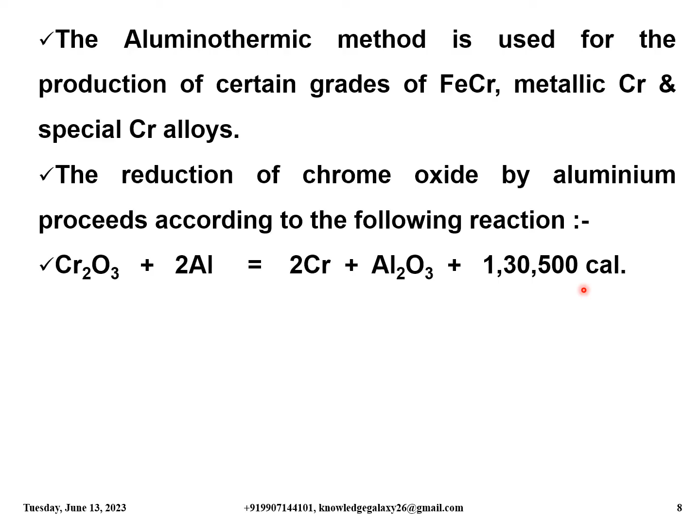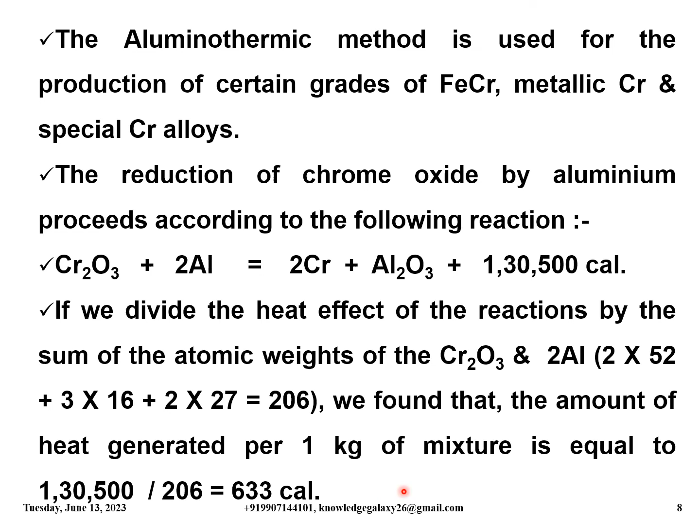If we divide the heat effect of the reaction by the sum of the atomic weights of Cr2O3 and 2Al, that is 2 into 52 plus 3 into 16 plus 2 into 27, which comes to 206, we find that the amount of heat generated per 1 kg of mixture is 1,30,500 divided by 206, equal to 633 calories. This amount of heat is more than required according to the rule set by Zhemchuzhny, who concluded that the realization of the aluminothermic process outside the furnace requires the specific heat effect, that is, the heat evolving in the reduction process per kg of mixture, to be above 550 calories.

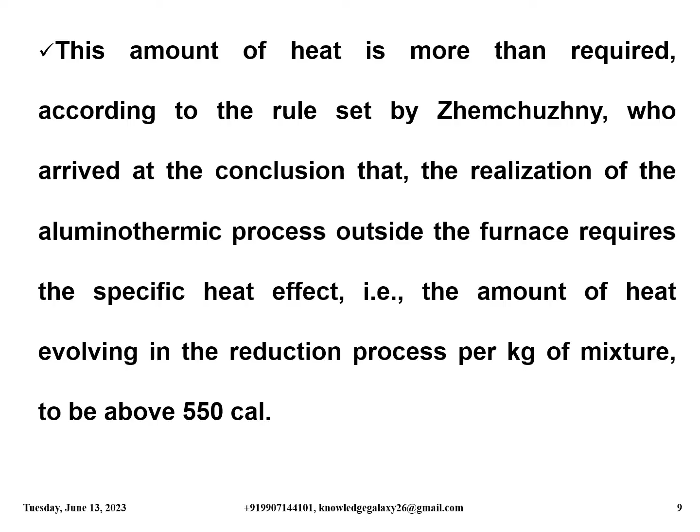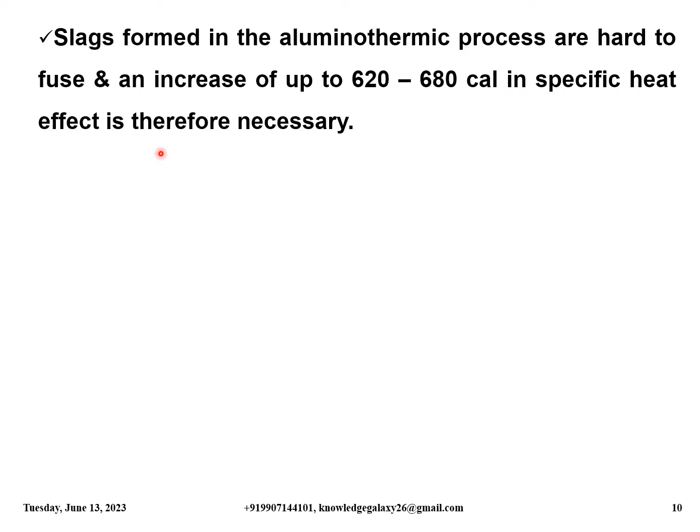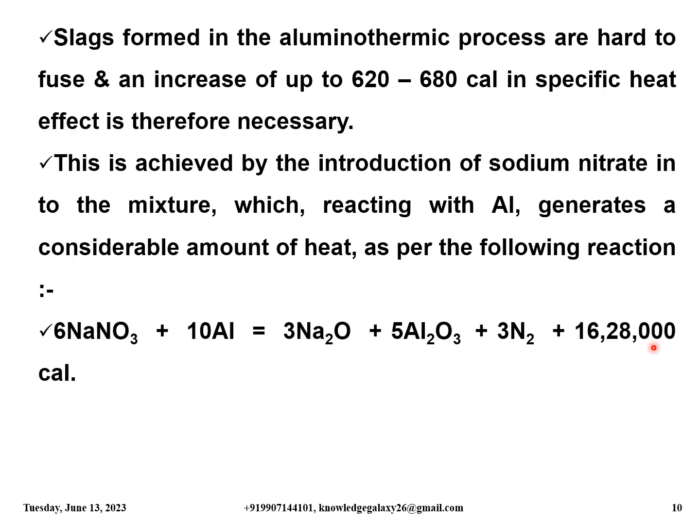Slags formed in the aluminothermic process are hard to fuse, and an increase of up to 620 to 680 calories in specific heat effect is therefore necessary. This is achieved by the introduction of sodium nitrate in the mixture, which reacting with aluminium generates a considerable amount of heat as per the following reaction: 6NaNO3 plus 10Al gives 3Na2O plus 5Al2O3 plus 3N2, generating 16,28,000 calories. This generated heat is very much sufficient to carry out the process by itself. Preheating of raw materials is worthwhile from the economic point of view.

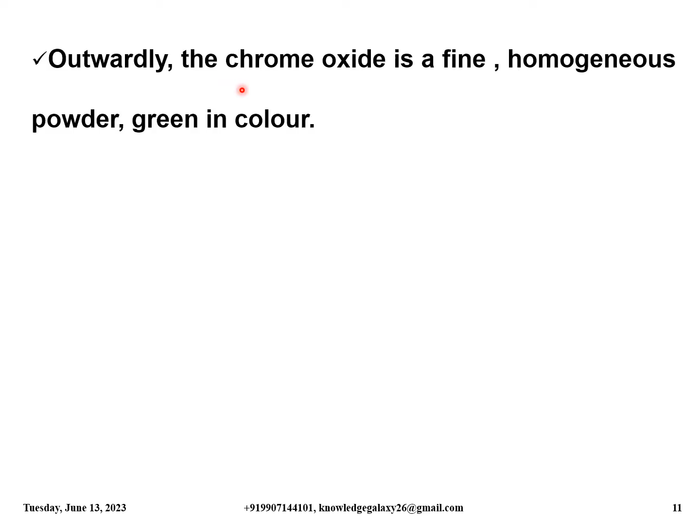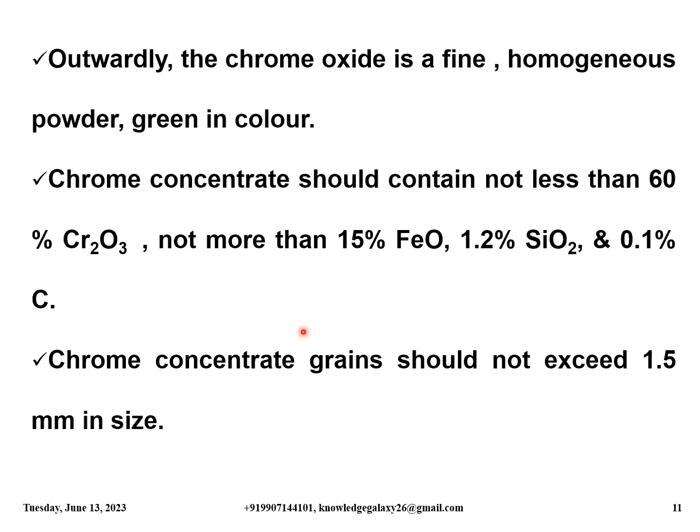Outwardly, the chrome oxide is a fine homogeneous powder, green in color. Chrome concentrate should contain not less than 60% Cr2O3, not more than 15% FeO, 1.2% SiO2 and 0.1% carbon. Chrome concentrate grains should not exceed 1.5 mm in size.

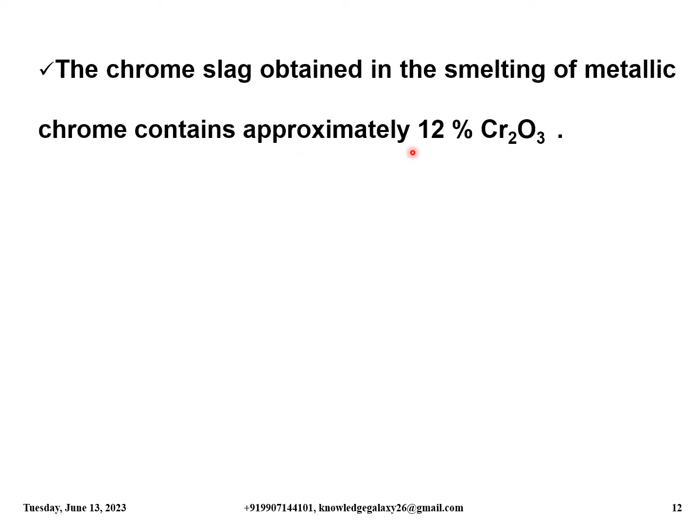The chrome slag obtained in the smelting of metallic chrome contains approximately 12% Cr2O3. It is crushed and sieved through a 1.5 mm sieve, and its sizing assay is as follows. More than 0.8 mm, it should be 20 to 30%. 0.3 to 0.8 mm size range, it should be 20 to 40%. Less than 0.3 mm size range, it should be 30 to 60%. So this is the specific size range for various sieves and its sizing assay.

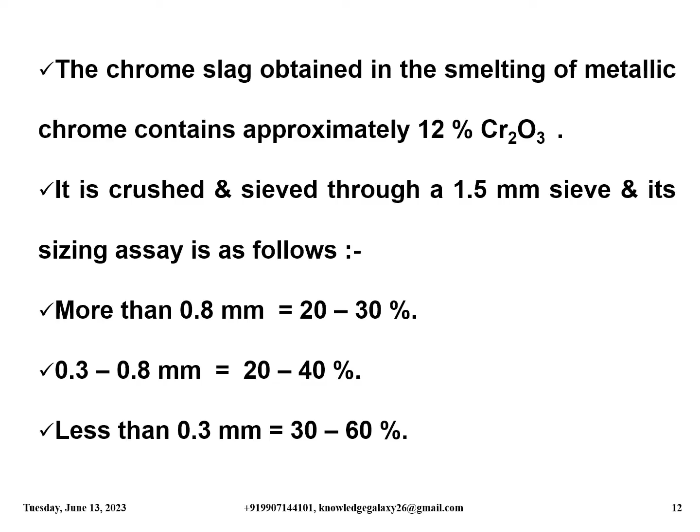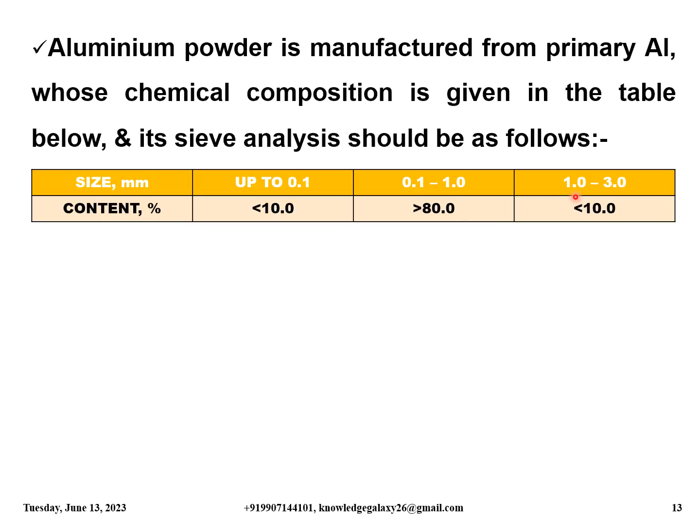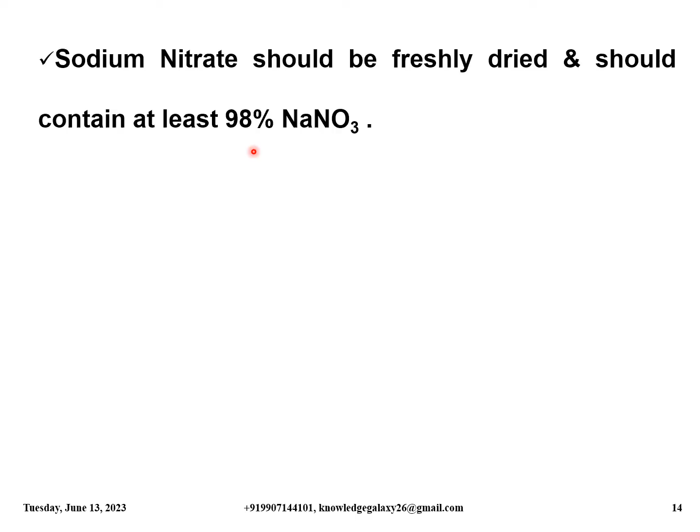Sodium nitrate should be freshly dried and should contain at least 98% NaNO3. The amount of chrome oxide or chrome concentrate smelted per heat ranges from 1000 to 3000 kg. The burden is carefully mixed for 30 minutes in a drum mixer. The smelting is done in a sectional cast iron shaft furnace.

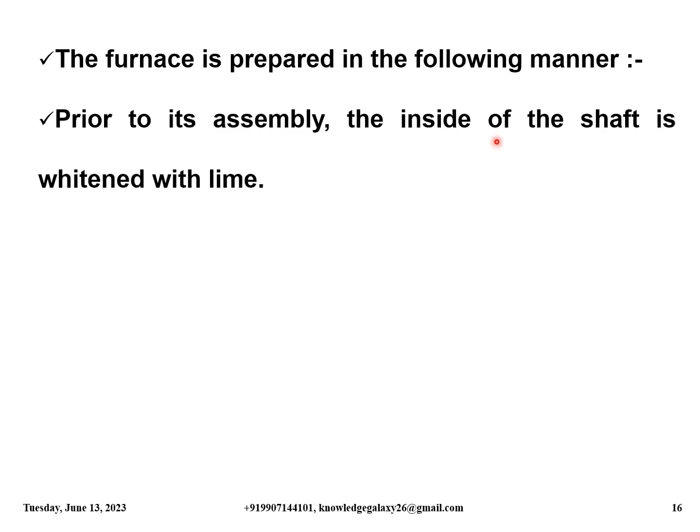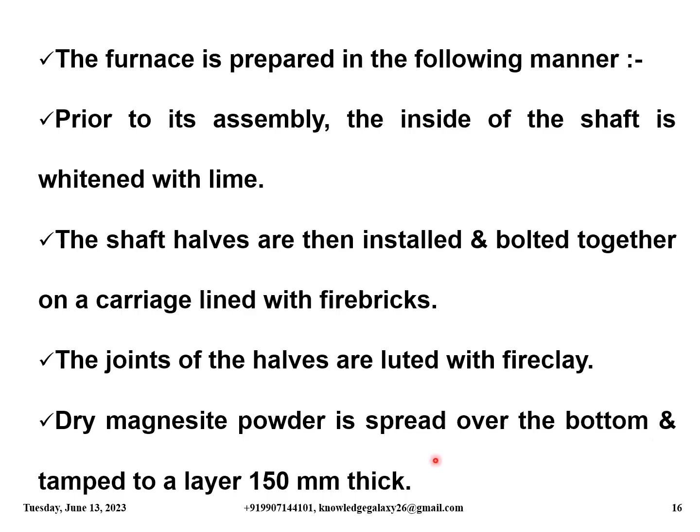So again, let's move on. Okay, coming back on track. The furnace is prepared in the following manner. Prior to its assembly, the inside of the shaft is whitened with lime. The shaft halves are then installed and bolted together on a carriage lined with fire bricks. Joints of the halves are luted with fire clay. Then dry magnesite powder is spread over the bottom and tamped to a layer 150 mm thick.

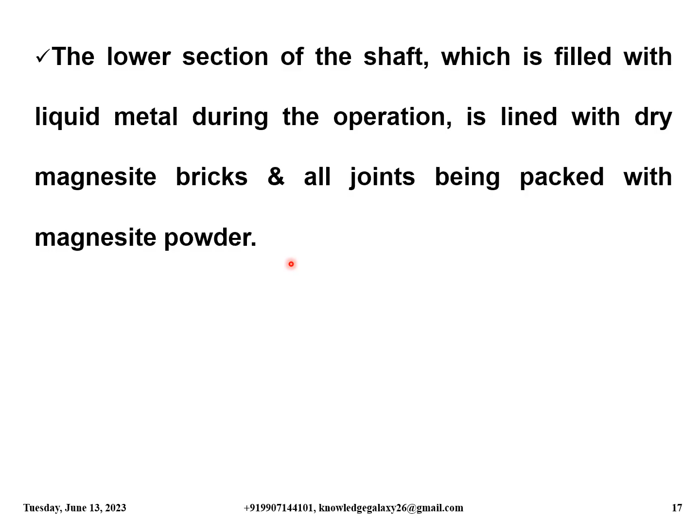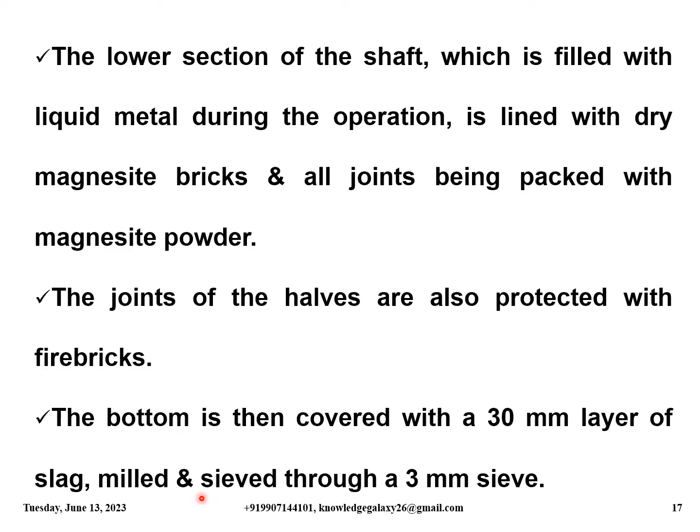The lower section of the shaft, which is filled with liquid metal during the operation, is lined with dry magnesite bricks, all joints being packed with magnesite powder. The joints of the halves are also protected with fire bricks. The bottom is then covered with a 30 mm layer of slag milled and sieved through a 3 mm sieve.

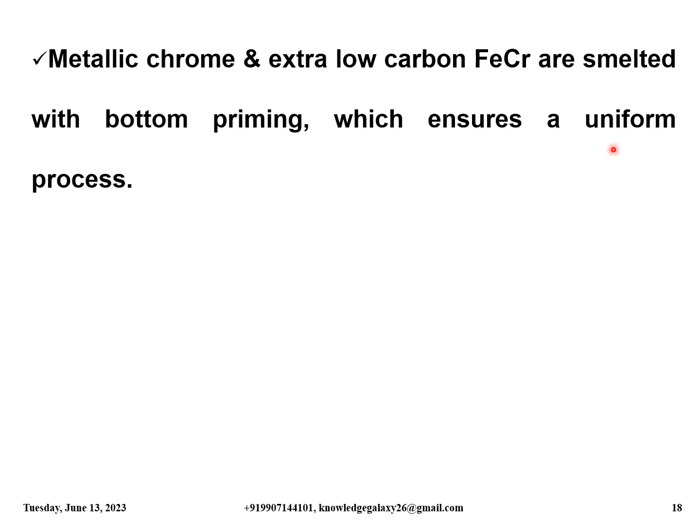Metallic chrome and extra low carbon ferrochrome are smelted with bottom priming, which ensures a uniform process. The mixture is charged on the shaft bottom up to the magnesite lining level before the primer is inserted. The primer mixture is put into a hole situated in the charge. The primer mixture contains 0.5 kg of magnesium chips and 0.5 kg of saltpetre.

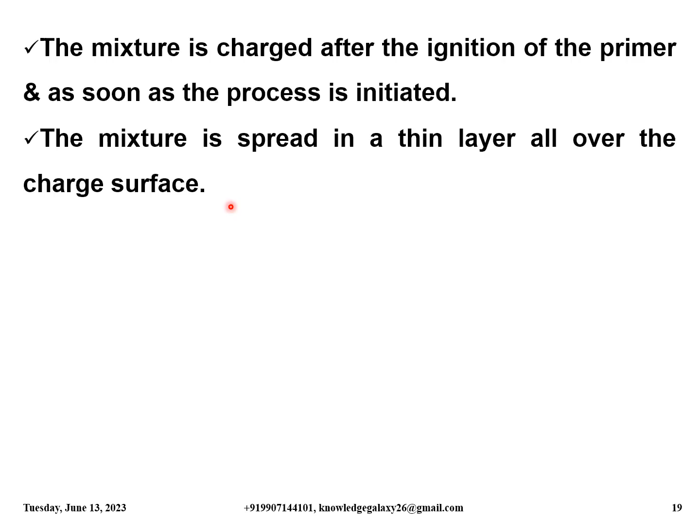The mixture is charged after the ignition of the primer and as soon as the process is initiated. The mixture is spread in a thin layer all over the charge surface. It is inadvisable to operate with an open top as this leads to heat losses.

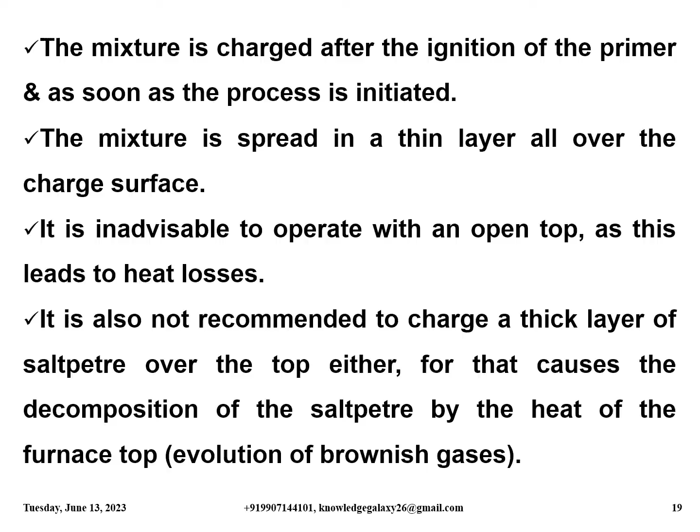It is also not recommended to charge a thick layer of saltpetre over the top either, for that causes the decomposition of the saltpetre by the heat of the furnace top, that is, evolution of brownish gases. The decomposition of the saltpetre by furnace top heat increases the aluminum content in the metal.

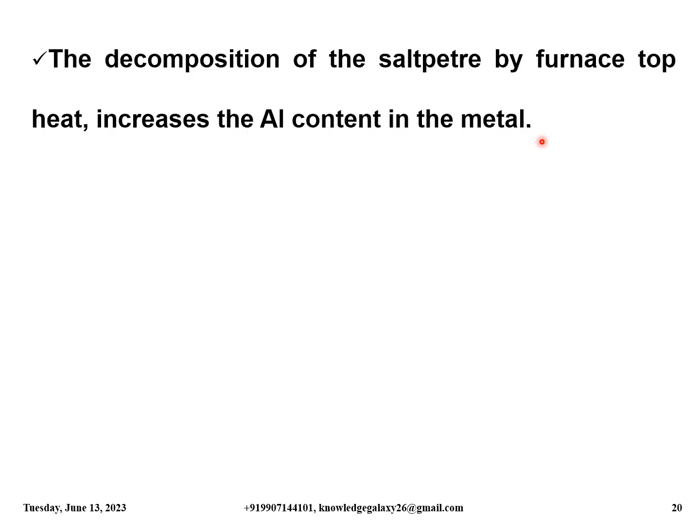The mixture, especially when one is smelting ferrochrome, should be charged in a manner excluding any interruption, for that may cause burden and melt eruptions by evolving gases. The process runs hot and the overall duration of the heat is approximately 5 minutes only. So my dear friends, you can now imagine how fast these reactions go and how fast they complete.

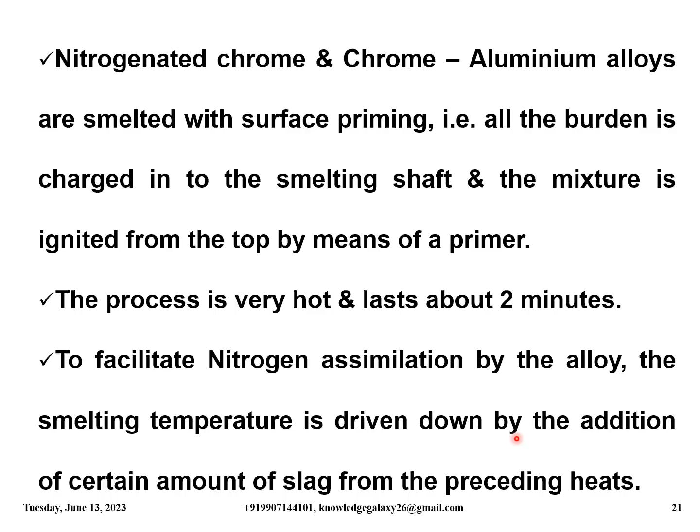Nitrogenated chrome and chromium aluminum alloys are smelted with surface priming, that is, all the burden is charged into the smelting shaft and the mixture is ignited from the top by means of a primer. The process is very hot and lasts about 2 minutes only. To facilitate nitrogen assimilation by the alloy, the smelting temperature is driven down by the addition of a certain amount of slag from the preceding heats.

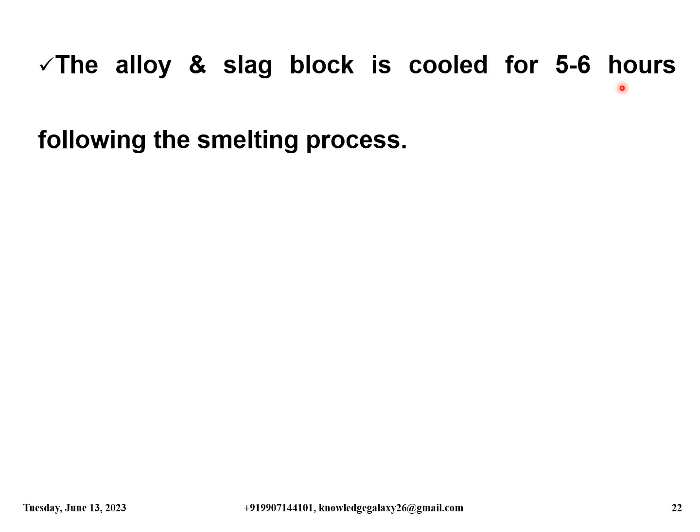The alloy and slag block is cooled for 5 to 6 hours following the smelting process. The shaft is then disassembled and dismounted. The alloy and slag monolith is left over on the car for another 3 to 4 hours, after which the slag is separated from the alloy.

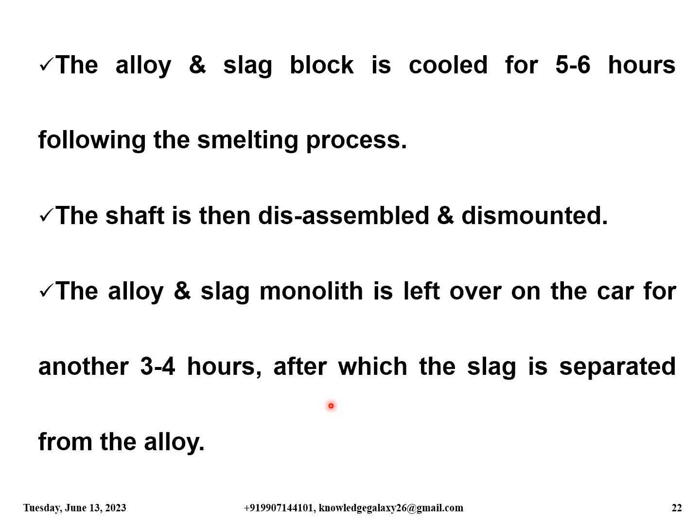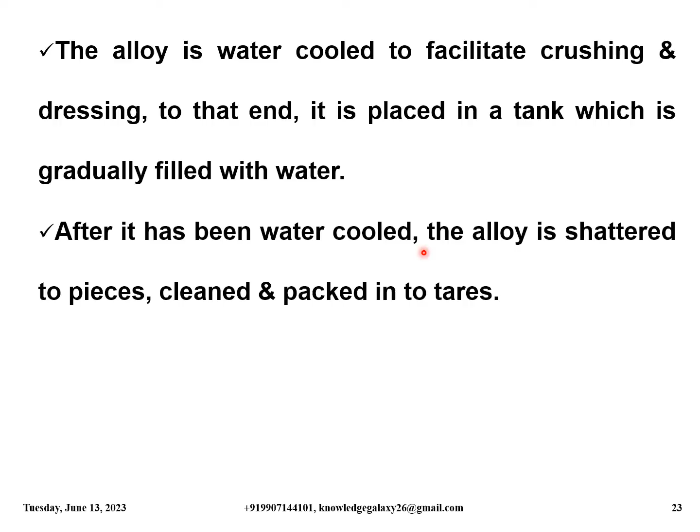The alloy is water cooled to facilitate crushing and dressing, so it is placed in a tank which is gradually filled with water. After it has been water cooled, the alloy is shattered to pieces, cleaned and packed into tares. At the same time, the alloy is sampled and analyzed for its grade determination.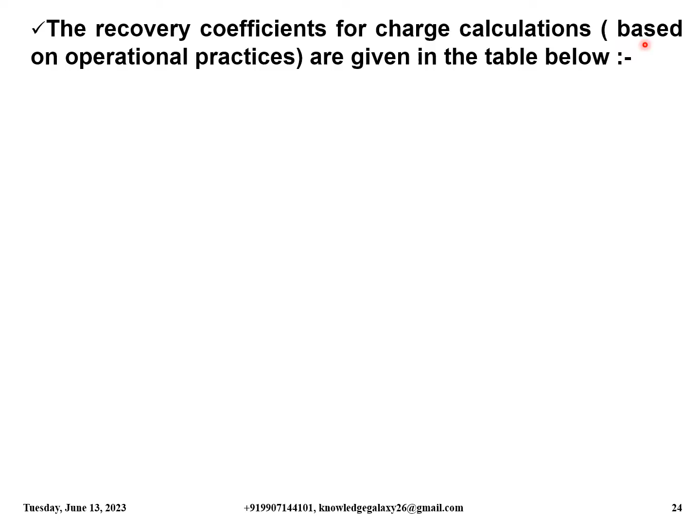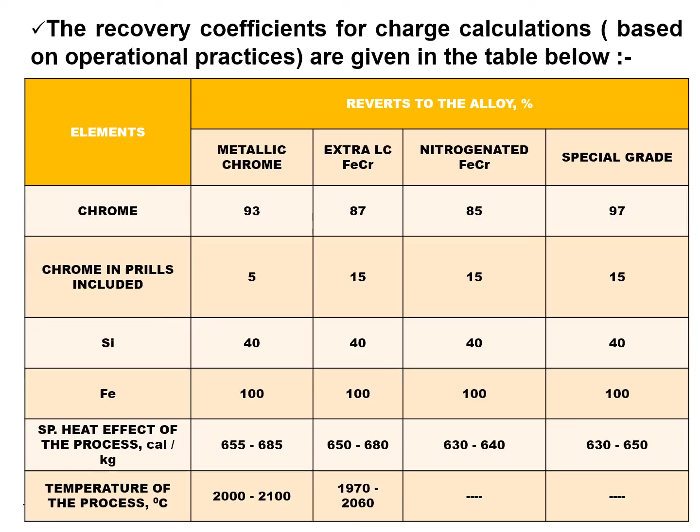The recovery coefficients for charge calculations, based on operational practices, are given in the table below. So you can pause this video and observe all the contents of this table. It is very important from the perspective of burden calculation for the aluminothermic process of chromium and chromium alloys. Okay, moving on.

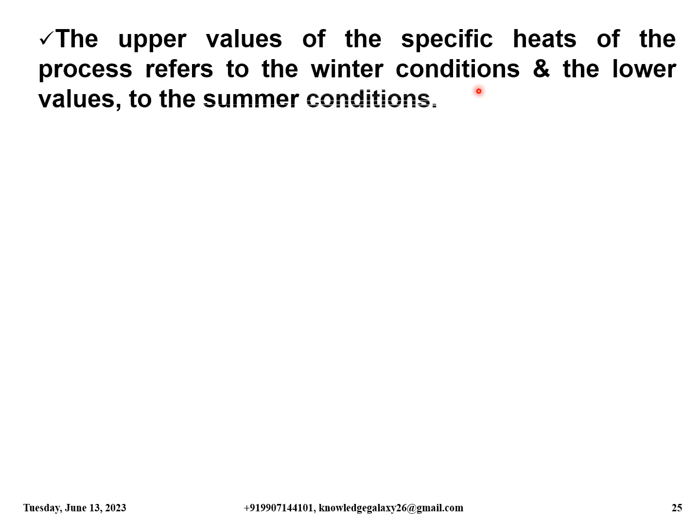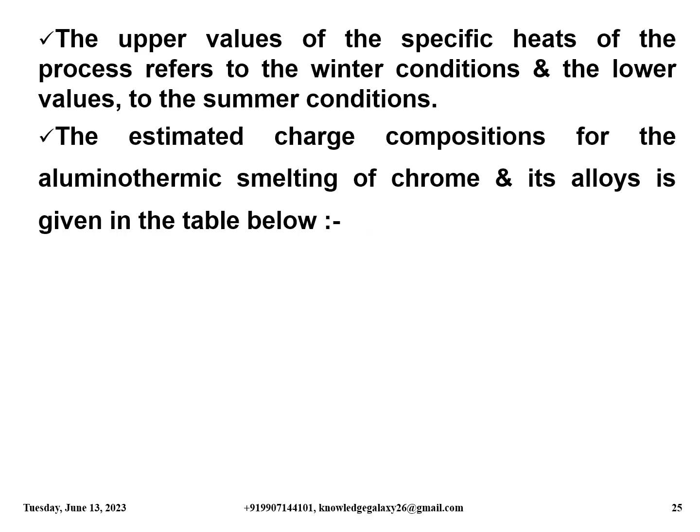The upper values of the specific heats of the process refer to the winter conditions and the lower values to the summer conditions. The estimated charge compositions for the aluminothermic smelting of chrome and its alloys are given in the table below. So you can now again pause the video and observe the contents of the table. Okay.

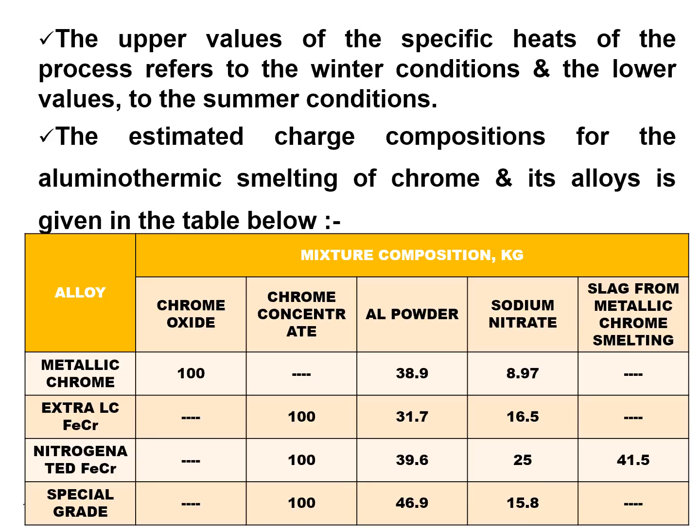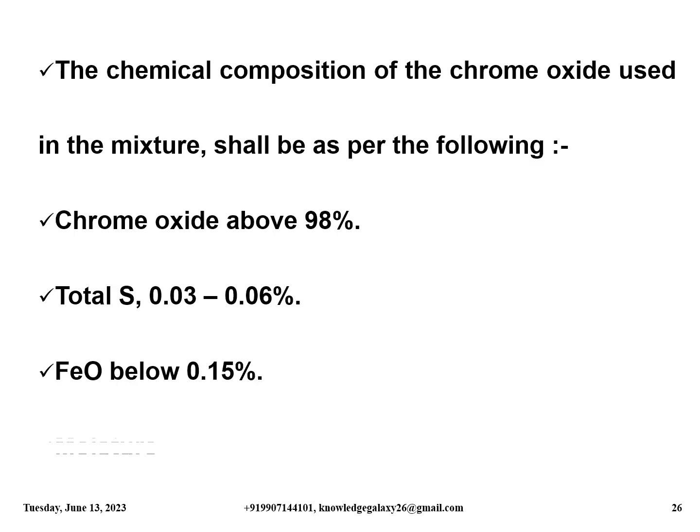Now moving on again. The chemical composition of the chrome oxide used in the mixture shall be as per the following table. Chrome oxide should be above 98%. Total sulfur should be 0.03 to 0.06%. FeO should be below 0.15%. Moisture should be below 0.15%.